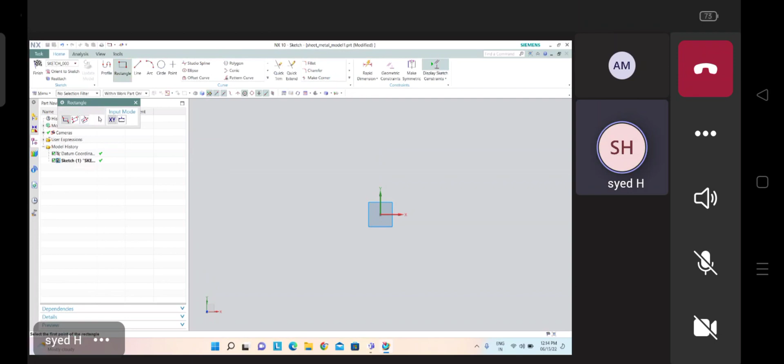Usually these punches we are not using in sheet metal designs, but still I will explain that one once. I will create one base sheet. Definitely we require this one. So rectangle, center rectangle I am taking here.

Finish. Okay, now see here I am getting one flange of this edge. Here some height, for example. This is my component now.

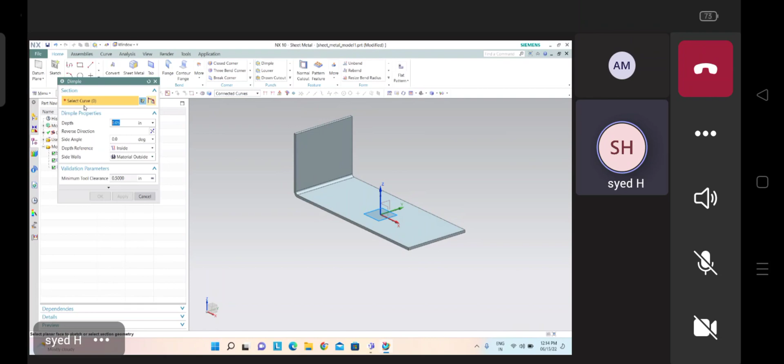The first one is dimple. Dimple is a kind of stamp here. So here we require one curve, and based on that curve only it will create the dimple. For example, I am taking here curve. Right now I don't have any curve, so we have to create one. Select any face for creating the curve, then you will enter the sketcher environment, and there you can create the curve.

I'm creating one rectangle, for example. Finish sketch. Now see here the dimple curve has been created. How much depth you require, you can specify here. How much height you want, you can specify here.

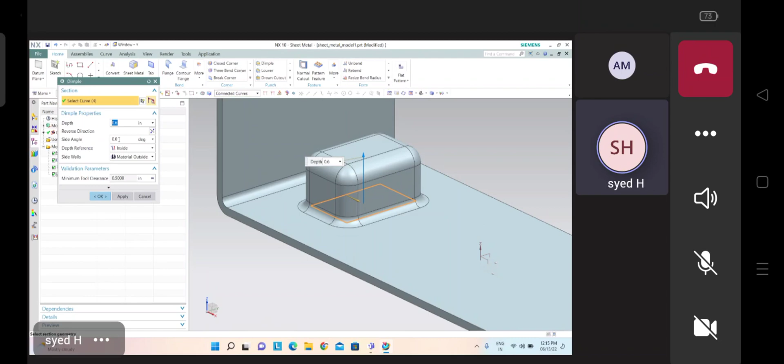Apart from that, if you want to give any side angle, meaning if you want to make this thing taper, you can make it taper by giving some angle, like 5 degrees. Now see here, it is making somewhat taper. If you see from the top side, you can see the difference. I'm giving the angle to be like 20 degrees - see, it is making taper like that.

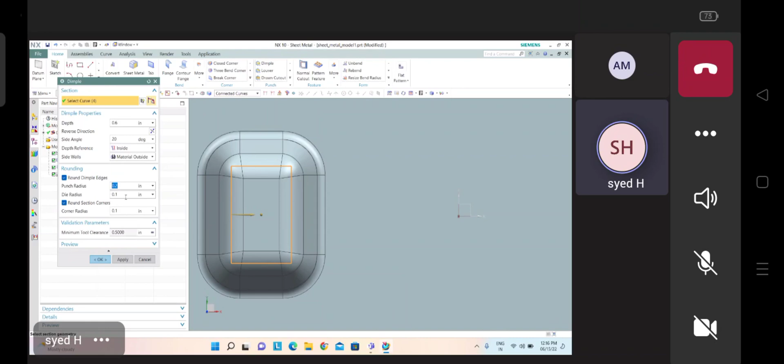So we can give this, and the remaining values will remain constant. For rounding, you can give punch radius, die radius - this radius which you are seeing here now, these fillets. So those radius you have to specify. Corner radius, how much you want? Corner radius I have given 0.1, die radius I am giving 0.1, and punch radius I am giving 0.1. If you want to change this, you can change here like this.

So like that we can keep these values how much we require. That is my first option, that is dimple. So inside you want, outside you want - see here, if you see from the bottom side you can see something here.

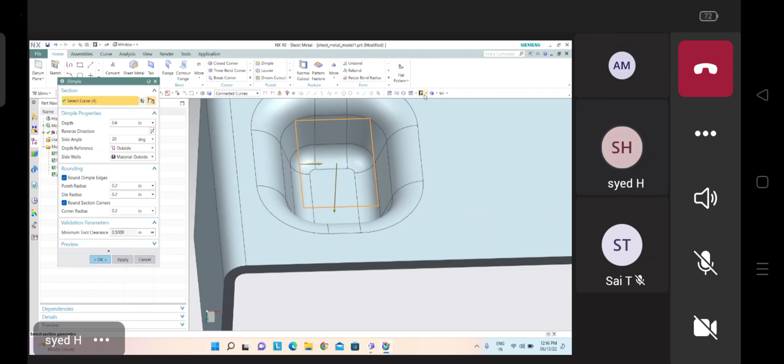See, this is my cross section now. If you take outside, the sketch will come outside here. If you go for inside, the sketch will come inside here. So like that we can see material outside, material inside - that also we can do here.

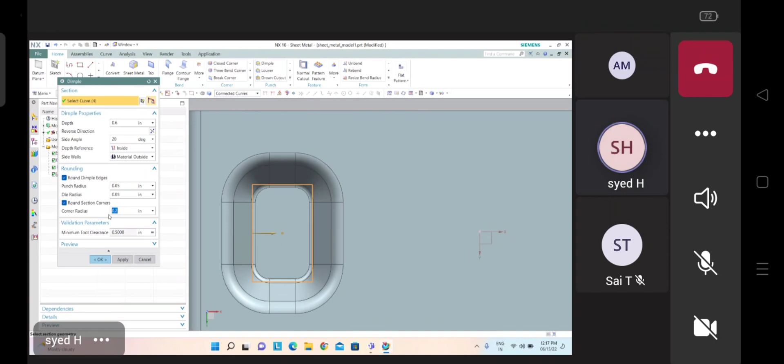But here I am getting very big radiuses, so I am giving 0.05 here. So like that these values we can give, how much angle you want. After giving these parameters, we can see the punch here on our face.

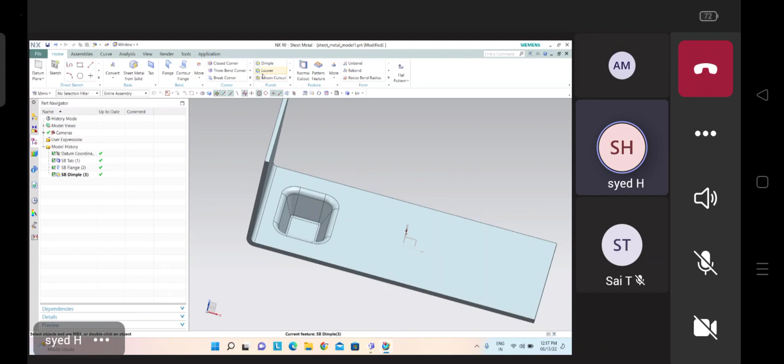This one is the first punch option. The next one is louver. For louver also we require some cross section here. I am giving one louver, I am creating here. For example, I am creating one rectangle here also. Finish sketch.

See here, width must be less than half the section depth. It's very big - I'm giving 0.1 only, for example. I'm changing the width value. Actually the depth value, whatever we are seeing here now, it should be less than half of the cross section - less than the cross section length. So this value we have.

Wait a second, Akhil. Yeah, now here, Akhil, we have two types of things here.

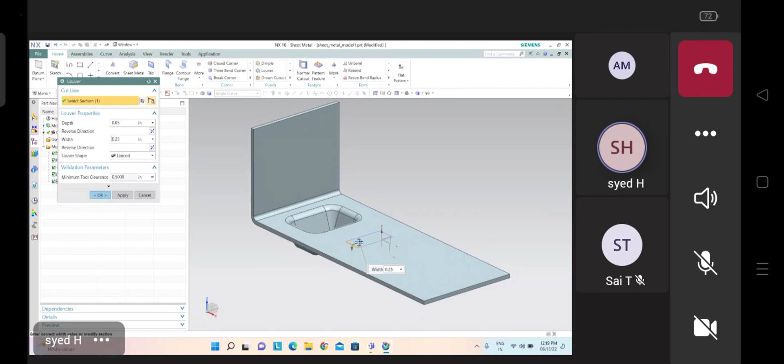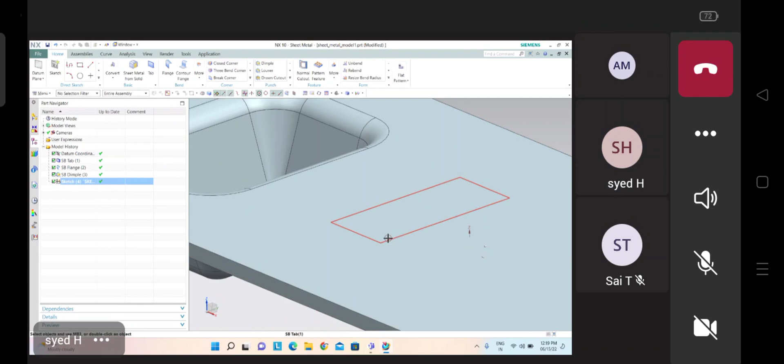Now see here, for louver we have to create an open profile. With the help of close profile also we can able to do.

Now depth, how much depth you require here, that much you can able to specify. It should be like the length value is there, so based on the length only it will take the value. So 0.4 it is taking. If I give more than 0.4, it shows an error there, that depth must be less than or equal to minimum material thickness. So I am giving 0.4 only.

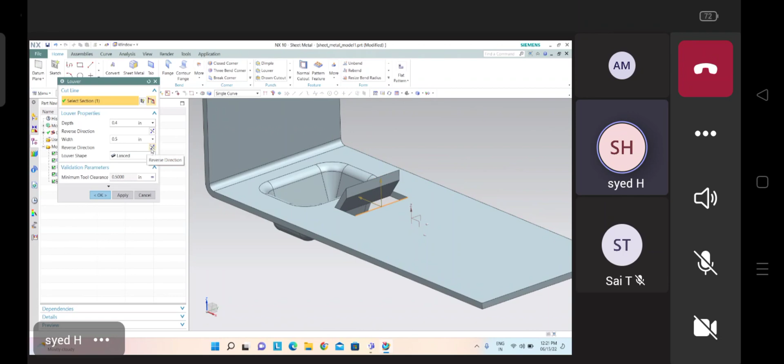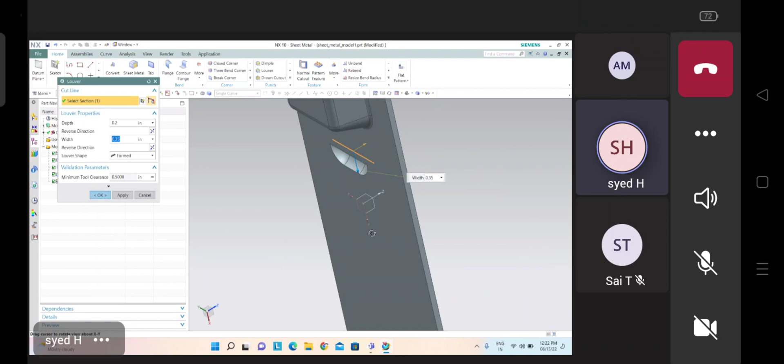Now see here, this is the first kind of louver. Here the first one is lanced, the other one is formed, like that. These things we can able to create with the help of this louver option. These louvers are somewhat useful in sheet metal designs, because we also use them in our company. Have you seen train windows? There you can find these kind of shapes.

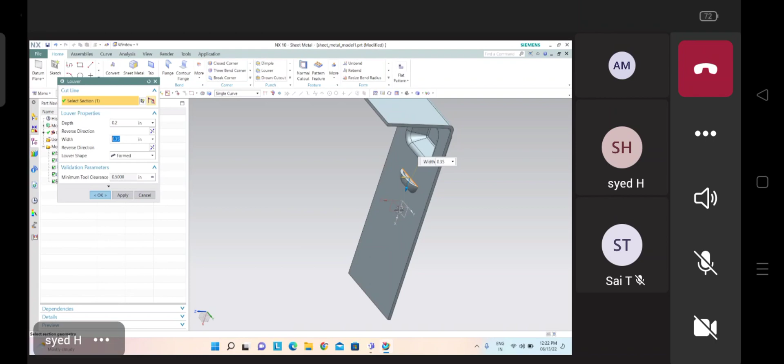With the help of louvers we can able to create these things. This is the louver option.

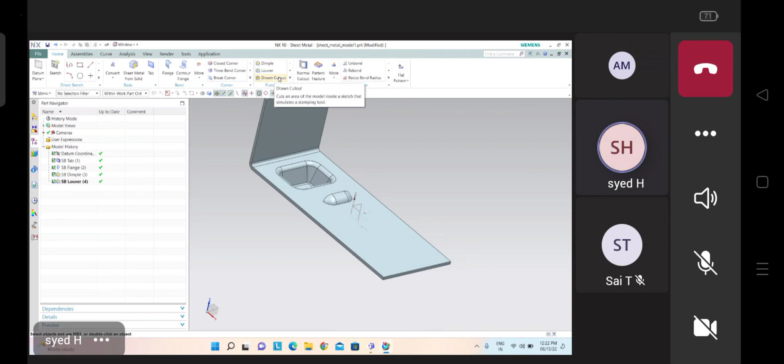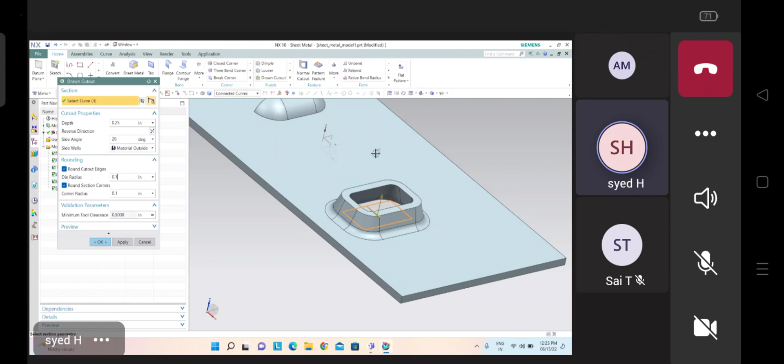The next one we can find here is drawn cutout. Go for drawn cutout, select this face for creating the sketch. For example, I am creating one rectangle, finish. Now see here, it will create like that. It is same like dimple, but in dimple it will not remove this bottom face, while in drawn cutout it will remove this bottom face. The remaining things will remain same, like roundings and side angles we can able to specify how much we want. The only thing changing is there it creates the bottom face, here it will not get any bottom face. That is my drawn cutout.

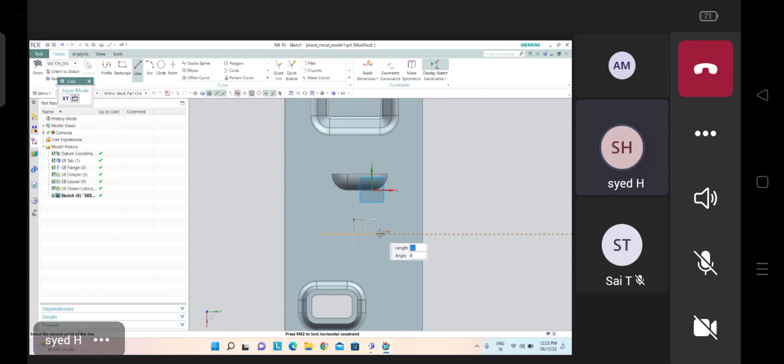The next option we can find here is bead. Bead requires here also one sketch, and it should be an open sketch only, like I am creating one line, finish sketch. So like that we can create the beads here. What depth you want, what radius you want, what form you want, lanced you want, or punched, how you want, you can create that. I want only form, for example, and give the parameter. Circular you want, U shape you want. If you give U shape, you can make like this. If you want the V shape, you can give V shape also, like that.

So like that we can create different shapes with different end conditions: form you want, lanced you want, punch you want, taper you want. So like that we can able to create our beads.

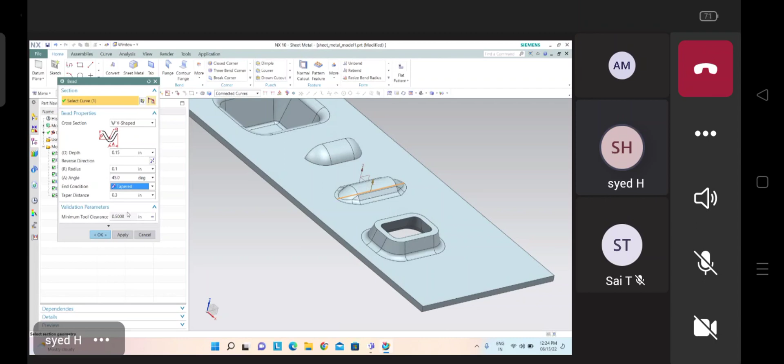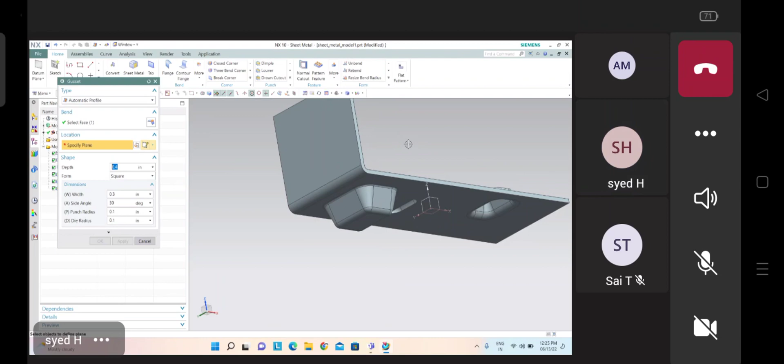The next one is gusset. Gussets will create on the bends area. For example, I have this bend now, at that location gusset will create. Select this face, plane you want to select, I am selecting this plane for example.

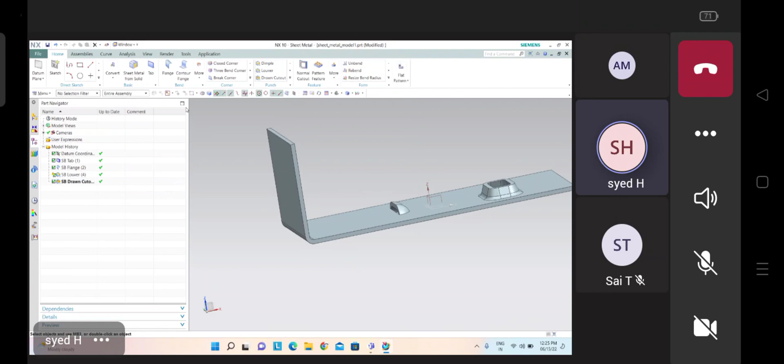Here we have some body which looks coming like that. First, I will delete this dimple here. Close. Now go for the option gusset on this face, plane as this one. Now see it's creating now. Why it was not creating previously is because here we have some feature like dimple feature, due to which it was not creating. Now we can able to create here.

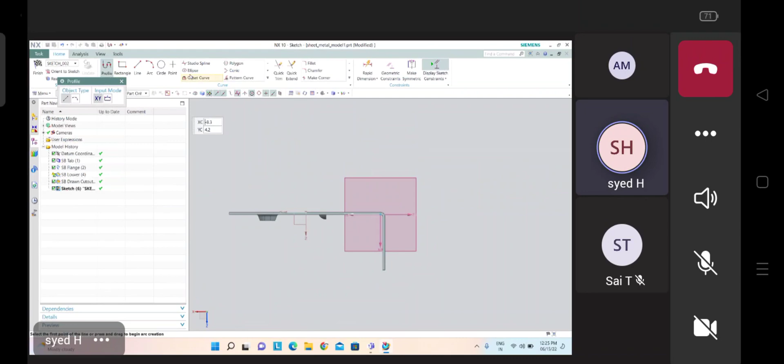Automatic profile you want, or manually you can able to create here, like curves, lines we can able to create. For example, if you go for user defined here, it is asking you to select the curve to create the sketch. I am creating here, what shape you require you can give. For example, I want like this. Finish. So the same thing it will create here also.

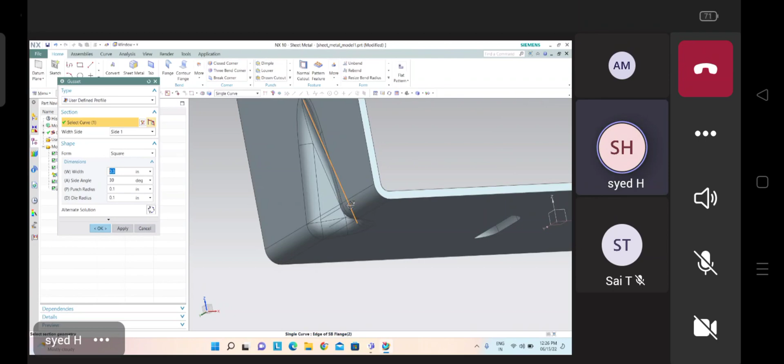Then width we have to specify, side angle we have to specify, punch radius we have to specify, and die radius we have to specify. So like that, gussets we can able to create here. Side 1, side 2, or symmetric. Square shape you want, round you want, so based on your requirement you can able to see here. Say it is a round shape. If you want square shape, it will come square shape also. That is my gusset option.

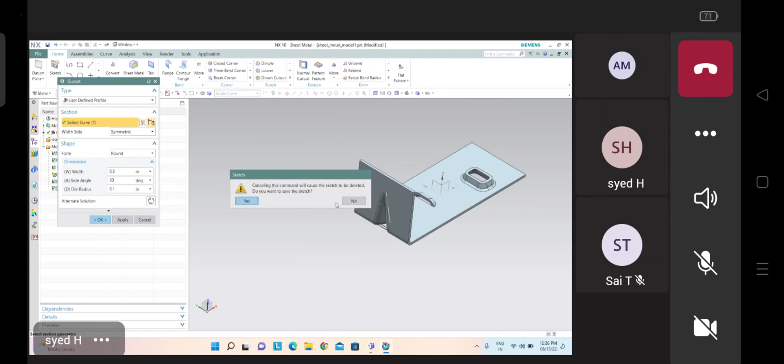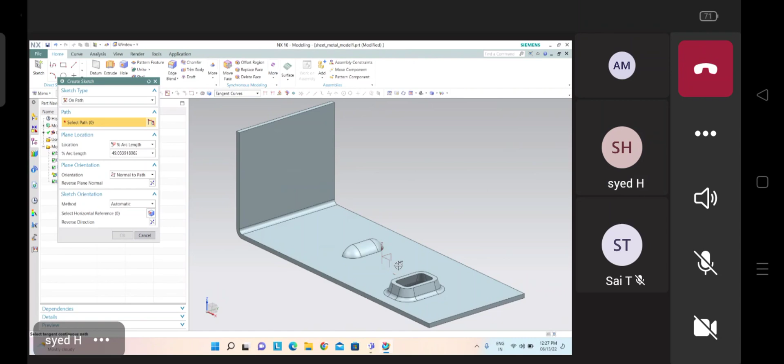I am creating one sketch on this face, and I am creating one rectangle thing. Close, finish sketch, extrude this one, in the reverse direction. Make it a little bit taper here, 2 degrees.

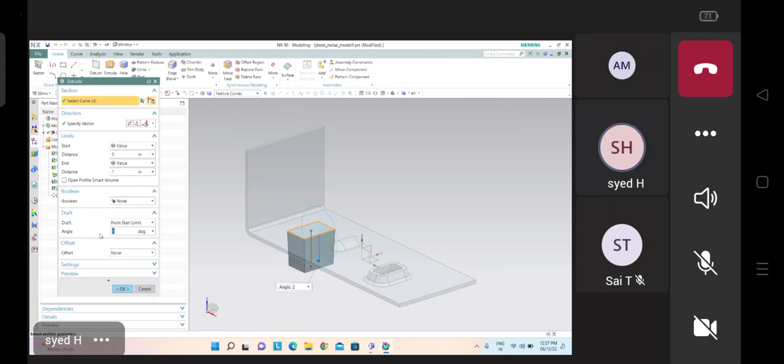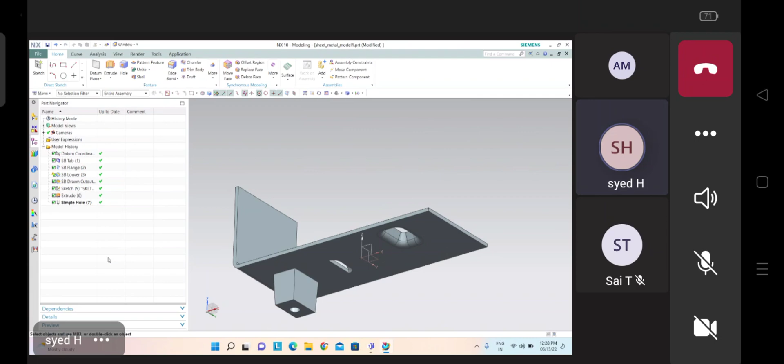Now I am making one hole in this geometry. Finish. Now see here, for this thing we have here something like that. The hole depth I am giving a little bit bigger only.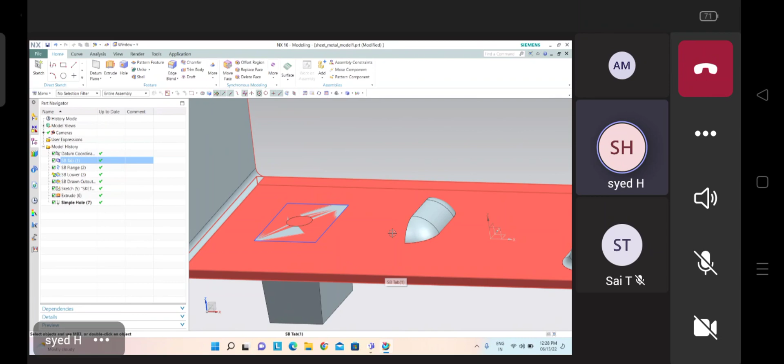Okay, I have this hole. Why is it not making a hole here? Because this and the sheet are separate geometry. This is a separate sheet here, so there is no relation between these two things. That's the reason it is not cutting this geometry. Okay.

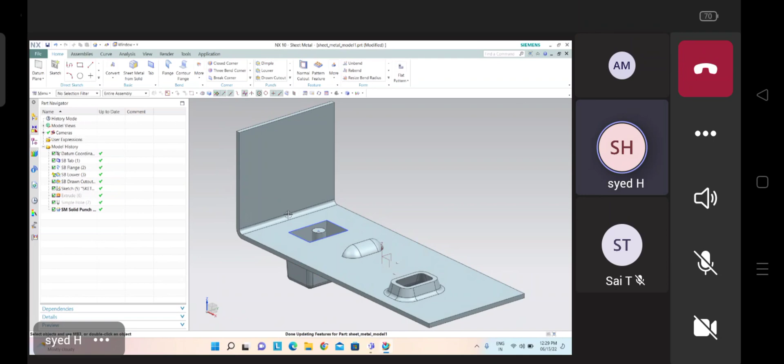Now go to sheet metal, Control Shift M for sheet metal. Now go for solid punch. Okay, the punch we have to select. For example, my target face is this one. The tool body is this one. Click OK. Now see here, the punch has been created. Okay. How did you create that thing? The same kind of punch it will create in this location.

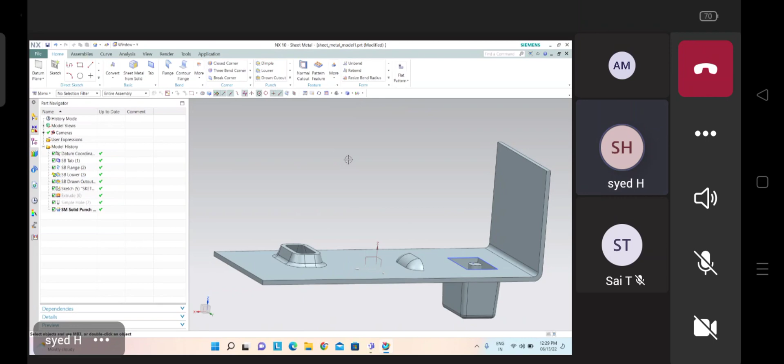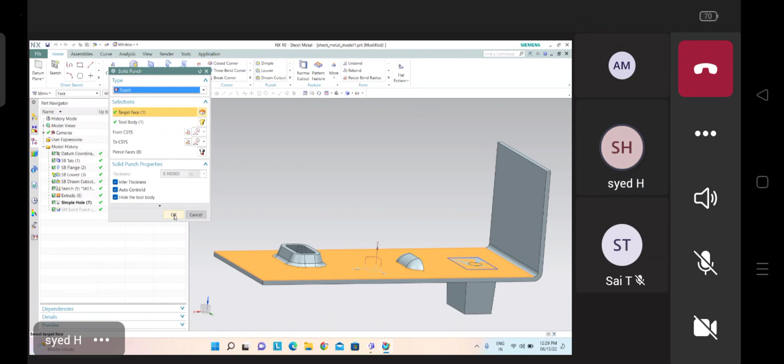Understand, guys, how to do this one? Nothing to it, we just have to create one solid body. Then come to sheet metal here, and that solid body must be intersecting with this sheet. Then take solid punch. On which face do you want it? I want the top face. Then which is your tool body? The body which you created in part modeling, that is your tool body. And click OK. So automatically your punch has been created.

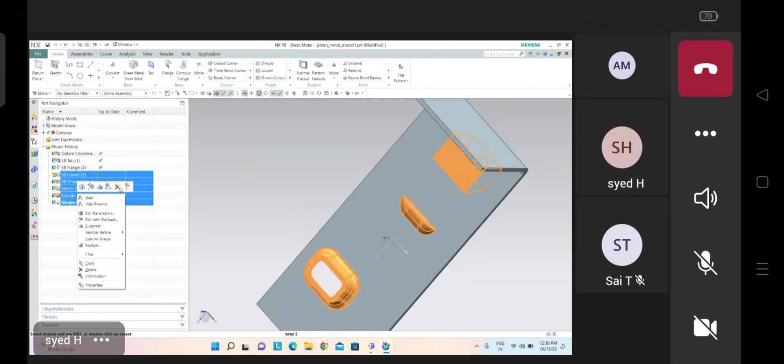Okay, so these are the different punches we are creating here. Yesterday I already explained normal cutout and pattern, you already know these commands, because we have discussed them in part modeling. Now the next option is unbend and rebend. Unbend and rebend is a very important thing.

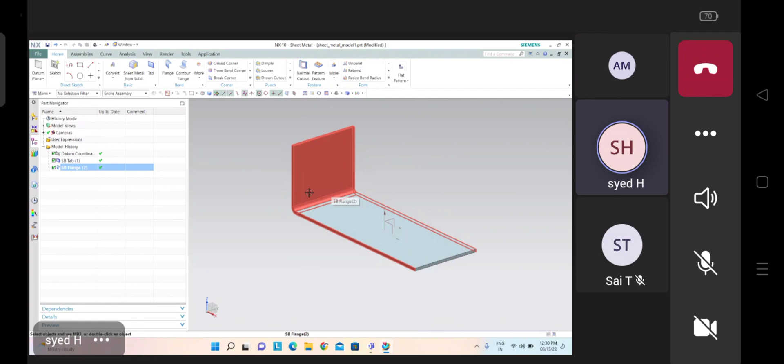Suppose for example I want one hole at this location, a hole lying on this face as well as on this face. In that case we can't directly make a hole here like that. So what we have to do is, first of all, unbend. It asks which one you want as the stationary face, for example this is my stationary face, then the bend face, I am picking this as my bend face. Now see here, it has been unbent. The bend portion will remain like that only.

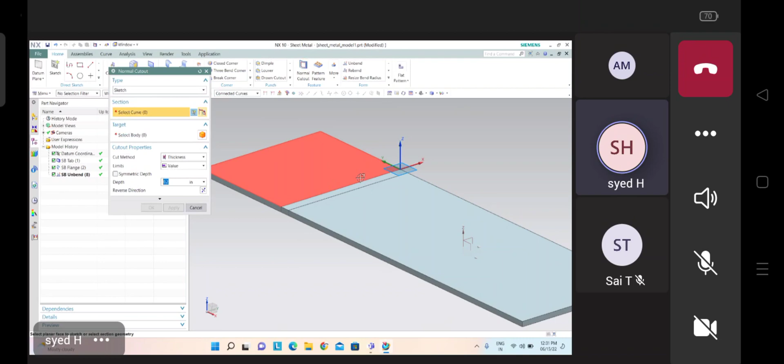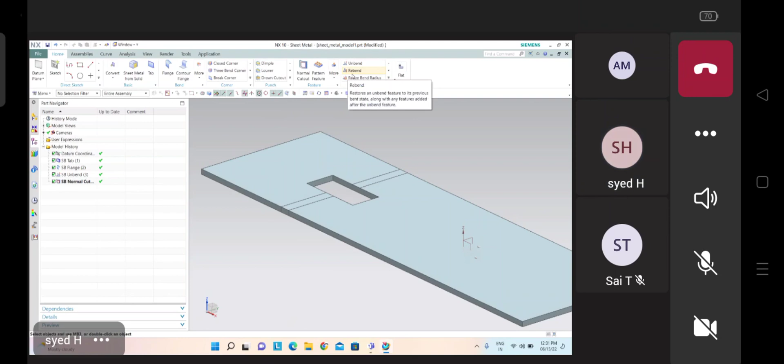Here is unbend. So doing unbend means the bending portion will not change, it will just make it like a flat sheet. Now whatever feature you want you can create. For example, I want a normal cutout on this face, and I am creating a rectangular cutout like this. Finish sketch. Okay, the normal cutout has been done. Then after performing this work, you have to rebend it again. So go for rebend, select this feature. Now see here, the hole is shared across both faces.

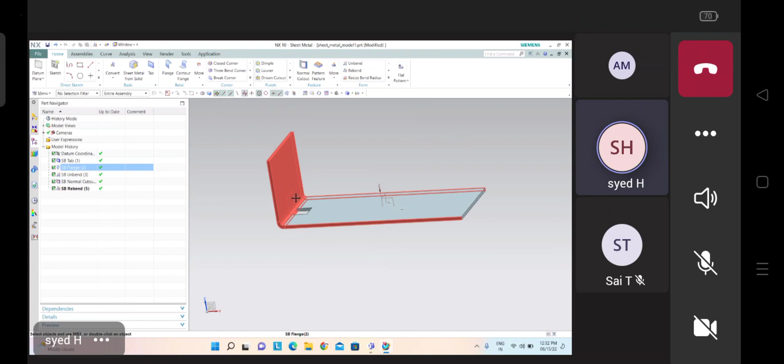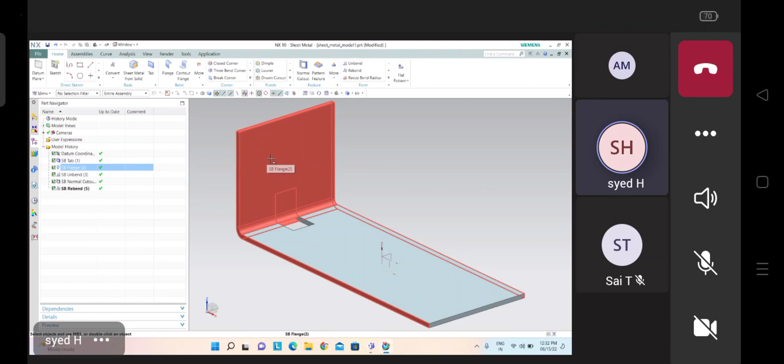So this is a very important thing which we are currently using in sheet metal designs. First of all we have to unbend this one, then make a cutout, then rebend. That is the work we have to do. Suppose you just take the sheet and make this cutout, it will not make a proper plan. That's the reason unbend and rebend is very important. Not only for this one, you will do many operations using unbend and rebend. Unbend means whatever bend there is, it will make it flat. Rebend means whatever unbend you have done, it will reverse that operation. That is unbend, rebend.

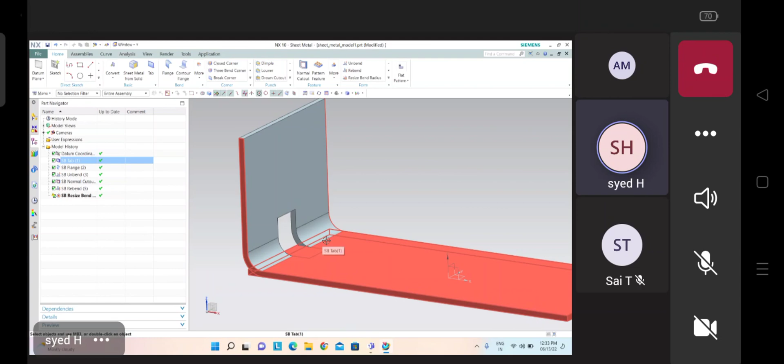Resize bend radius. If you want to resize your bend radius, you can resize it here. It is saying the design intent of deform or cutout features may have changed after resizing the bend radius. Here we have one cutout, and because we are changing the bend radius, it may get deformed. It is showing a warning. So let's see what deformation we can see. We are not seeing any deformation here, it remains like that. Like that we can resize our bends. Initially it was 0.1, right now I made it 0.2, now I want to make it 0.3. Whatever bend radius you require, you can keep.

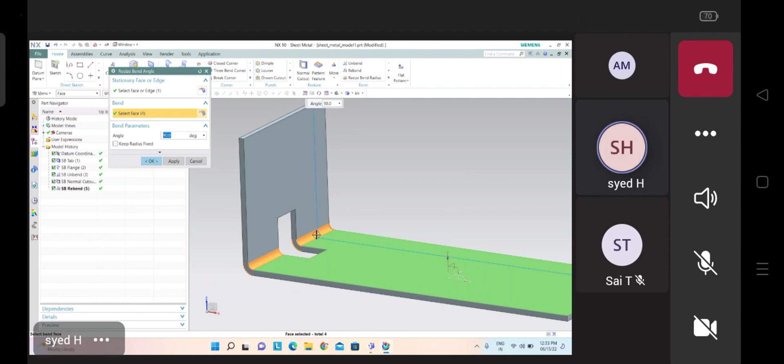The next option you can find is resize bend angle. For example, here we have a bend. If you want to change the angle of this bend, we can do it. Which stationary face do you want? I want this to be the stationary face, and this is my bend. Now how much angle do you want? 90 is there, I don't want 90. I want 45 degrees, for example. Okay, so like that we can set the bend angle, we can resize our bend angles.

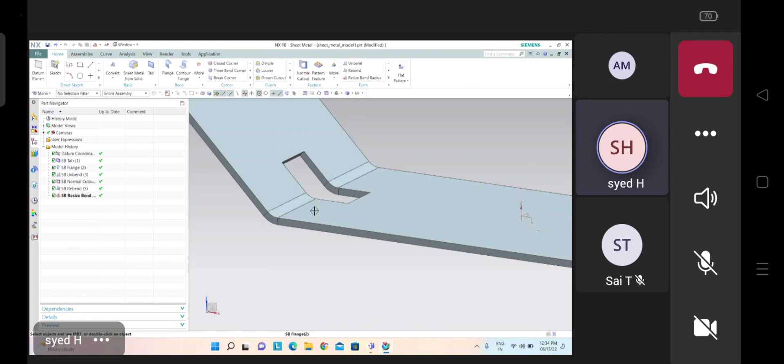For example, if you already created a flange and want to change its angle, you can do it like that. Here also we can change it by double clicking on it. With the help of this one also we can do it. Okay.

Then the neutral factor is not that much of a required option. Why? Because it is only used when we are using the proper materials. In that case we are able to see the differences. Now you can't see anything, right? Because the value is very small here, and this neutral factor is usually a formula value. It is a standard value actually. Based on the material capability, this value gets decided. So even if you change it, you can't see anything. That is your neutral factor.

The last option you can find here is flat solid, flat pattern, export flat pattern. This is a very important thing here, flat patterns. In CAD also I explained to you regarding the flat pattern. Here also the flat pattern is very important. What is the use of a flat pattern? For example, I require a sheet. That sheet we usually cut in CNC machines, laser machines. In those we cut the sheet metal sheets.

For CNC we require the coding. That coding we do with the help of DXF files. In NX we can directly create the DXF file. That file we use to generate the G codes and M codes. For that reason, we create the flat. Flat pattern means it will not show any bends to you. It will just show the bend lines in the drafting area. The complete part looks like a single sheet in the flat pattern, with all the dimensions. So that is very important.

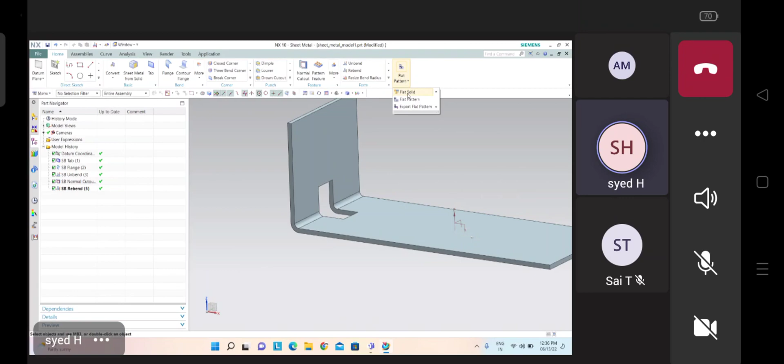So first of all, you have to go for flat solid. What is the stationary face? This is my stationary face. Click. Now see here, the flat solid has been created. The next thing is flat pattern. Go for flat pattern. The stationary face is this one. Click.

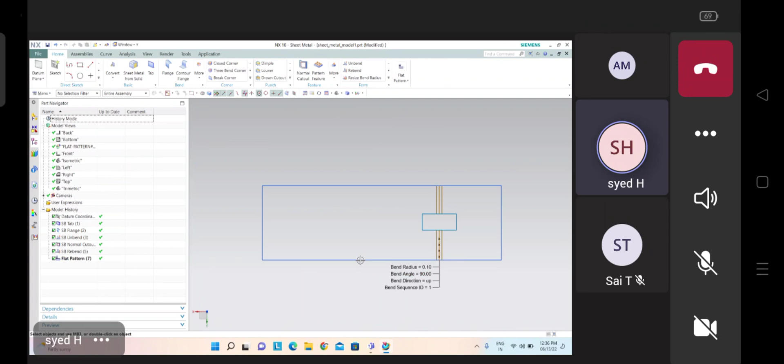Now what happened here? Right now you can't see anything here, but when you go to the model views, you can see the flat pattern view is there. Just double click on that one. Now you can see the flat pattern view. In drafting it will show like this. That is my flat pattern. Understand this one? Nothing is there.

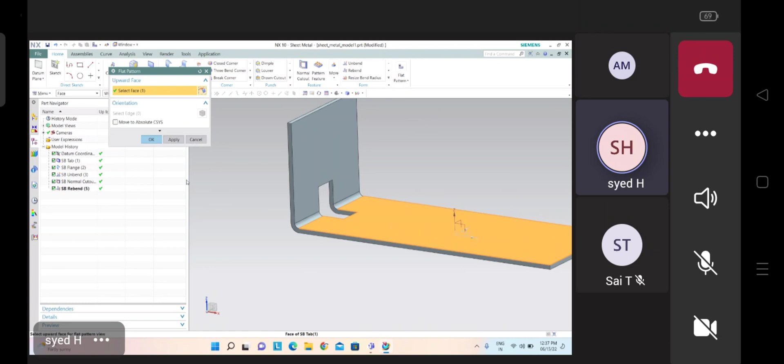Now go for flat pattern. Select the stationary face, whichever one you want to make the stationary face. For example, this is my stationary face. Click OK. It says the flat pattern feature is created in the flat pattern view. The name of that view is flat pattern number 1. Place the view to see the flat pattern. Now the flat pattern has been created. If you want to see this flat pattern, you have to go to model views. Double click on this flat pattern. Now you can see the flat pattern.

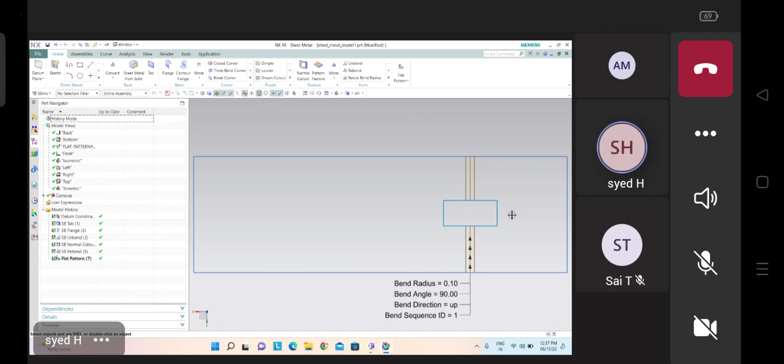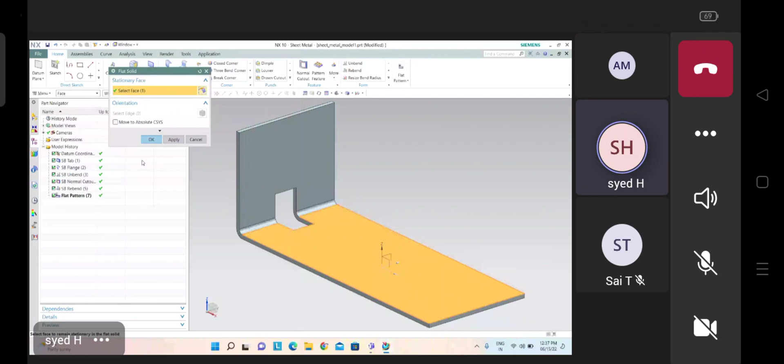Flat solid is also required. Flat pattern is also required here. First of all, we have to create the flat pattern. Then we have to go for flat solid. Go for flat solid. Select this one. Now see here, flat solid is there, flat pattern is also there. Like that we can create the things.

Export flat pattern means exporting whatever flat pattern you create, like as a DXF file, as I already said. With the help of this DXF file, we create the G codes and M codes for the CNC machine. Understand?

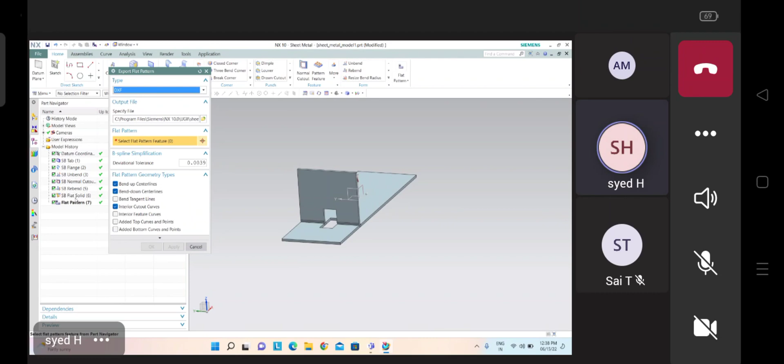Yes, sir. This is the sheet metal design. If you have any doubts, you can ask. No, sir. No doubts.

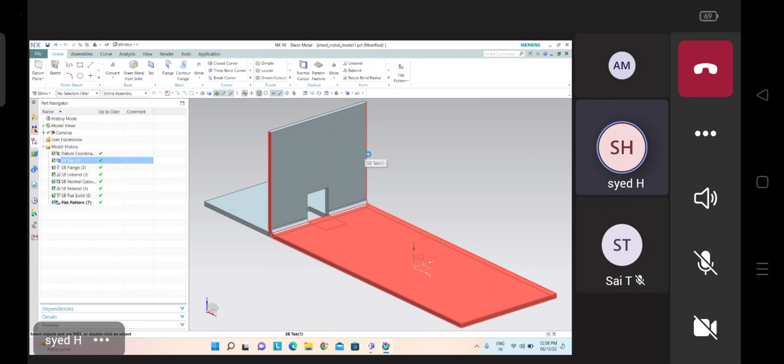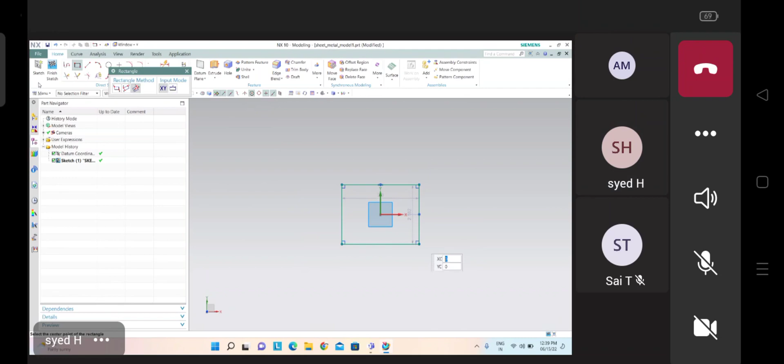And one more command is left that I forgot to tell you. Pressing M, go to the modeling area. Creating one sketch. Creating one center rectangle. Finish. Extrude this one. Now go to sheet metal by pressing Ctrl Shift N.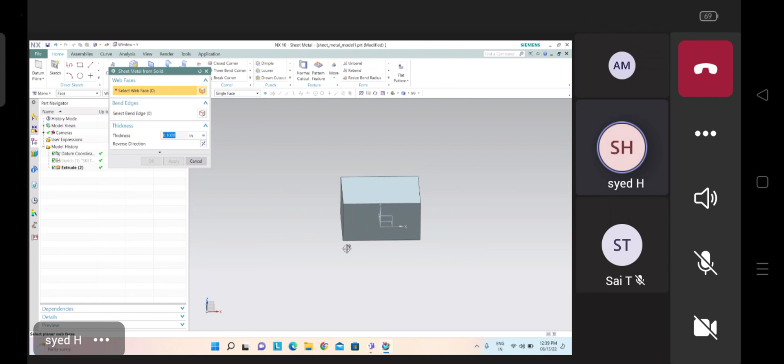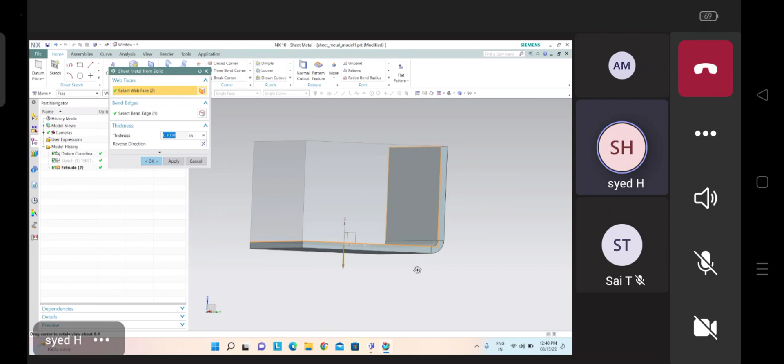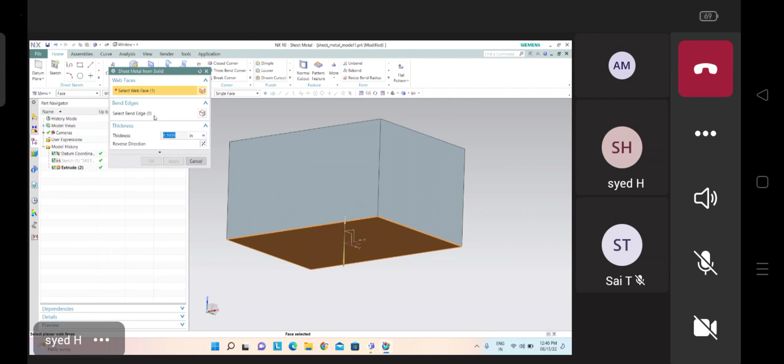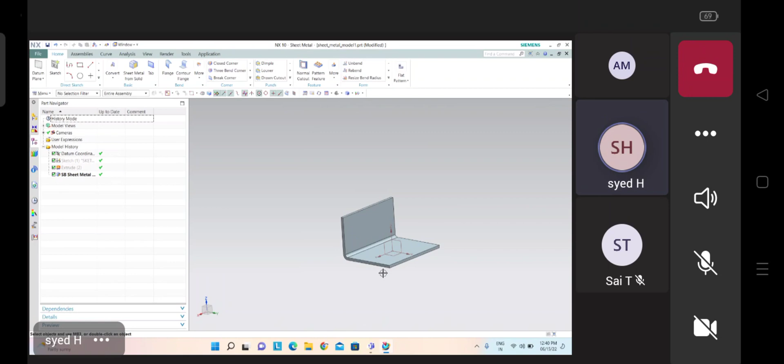Then you can also find the convert to sheet metal wizard. Select the edge. Convert to sheet metal, this one. Also wrong. Actually, when we are using the licensed version, it works properly. With a single command we can convert our solid body to a sheet metal body just by clicking on it.

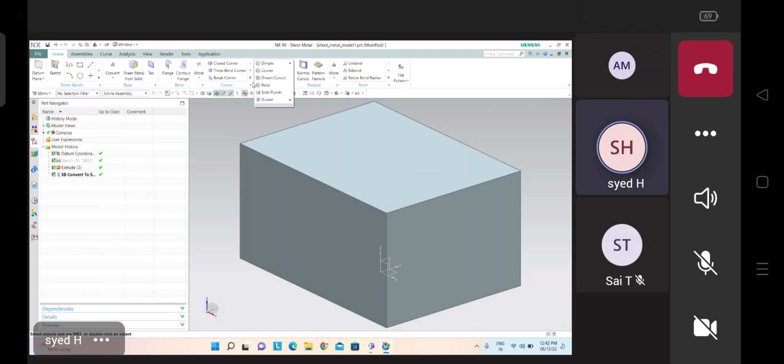Okay, so like that we can create sheet metal. Any doubts guys in this one? No, sir.